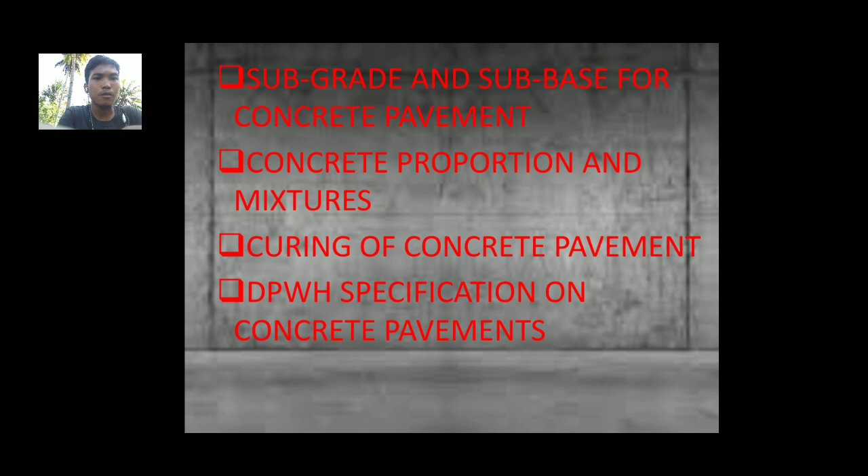So, good morning guys. I'm Jerin Cobol and I'm going to report subgrade and subbase for concrete pavement, concrete proportion and mixtures, curing of concrete pavement, and DPWH specification on concrete pavements. So, let's start with subgrade and subbase for concrete pavement.

Pavement is durable surface material laid down on an area intended to sustain vehicular or foot traffic. So, layers of pavement: concrete slab or surface course, sub-base course, then sa pinakababa, subgrade course. So, subgrade is the layer of natural soil prepared to receive the stresses from the layers above. So, itong pinakababa na katong ginatamper na yuta.

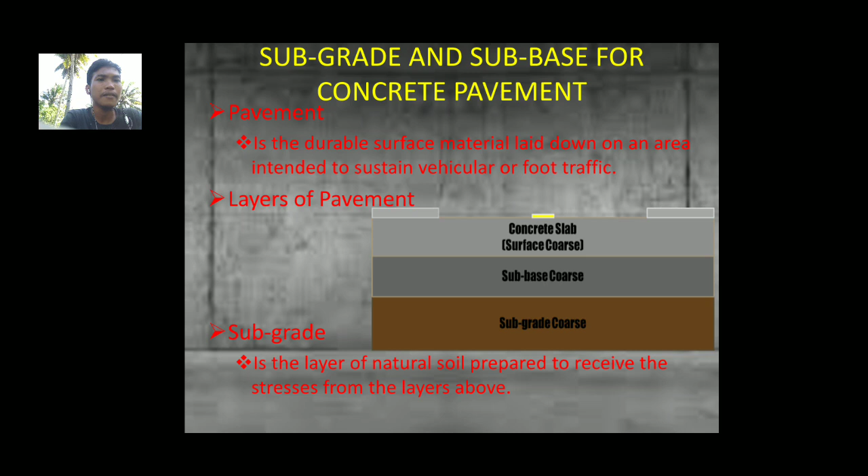Then, how thick should a subgrade be? It should be thick enough to withstand the loads acting upon it. Sa subbase, the subbase course is a layer of material beneath the concrete slab, and the primary functions are to provide structural support, improve drainage, and reduce the intrusion of fines from the subgrade in the pavement structure. How thick should a subbase be?

Thickness of subbase can range from 75 to 100 mm or 3 to 4 inches for garden paths, through 100 to 150 mm or 4 to 6 inches for driveways and public footpaths, and 150 to 225 mm or 6 to 9 inches for heavy use roads. Depende rin na siya sa imong buhatan kung unsang mga loads ang mga gidra.

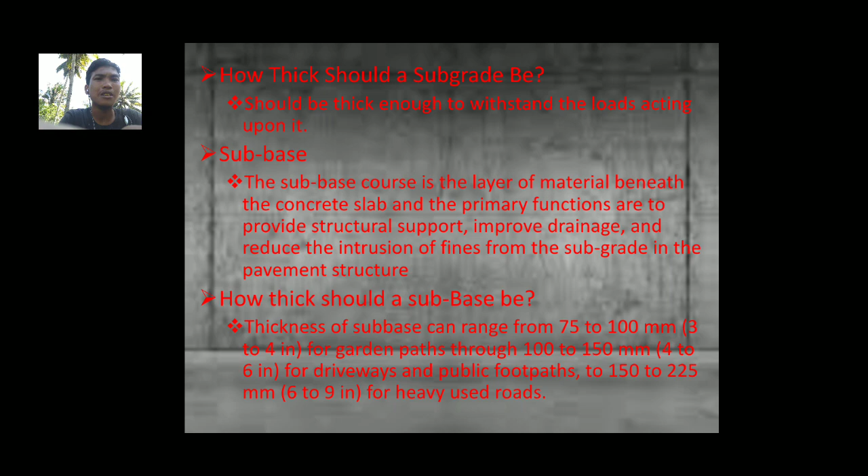So, dito to sa concrete proportion and mixtures. Concrete mix design is the process of finding the right proportion of cement, sand, and aggregates for concrete to achieve target strength in structures. The concrete mix involves various steps, calculation, and laboratory testing to find the right mix proportion. This process is usually adopted for structures which require higher grades of concrete such as M25 and above, and large construction projects where quantity of concrete consumption is huge.

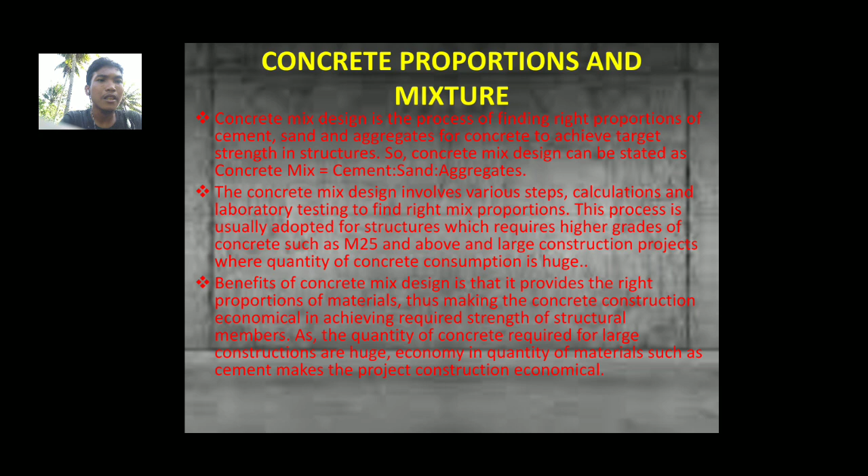Benefits of concrete mix design is that it provides the right proportion of material, thus making the concrete construction economical in achieving required strength of structural members. As the quantity of concrete required for large construction is huge, economy in quantity of materials such as cement makes the project construction economical. So, example ta og mix.

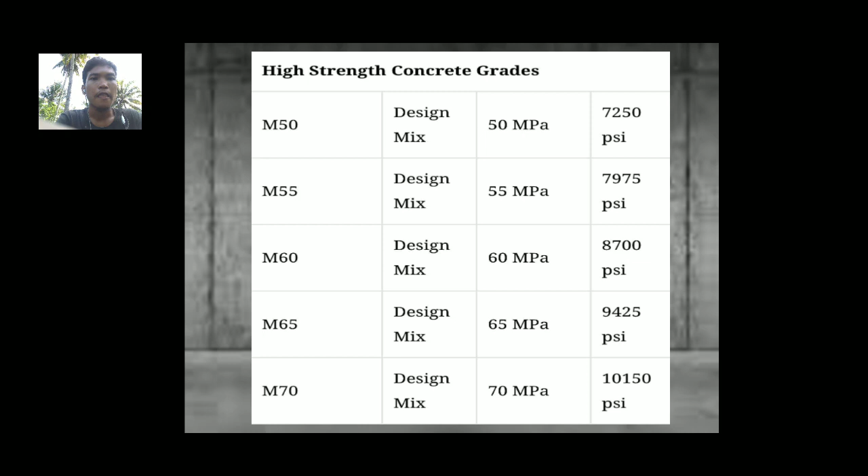Then curing of concrete pavement is maintenance of satisfactory moisture content and temperature in concrete for a period of time immediately following placing and finishing so that the desired properties may develop. So, methods and materials.

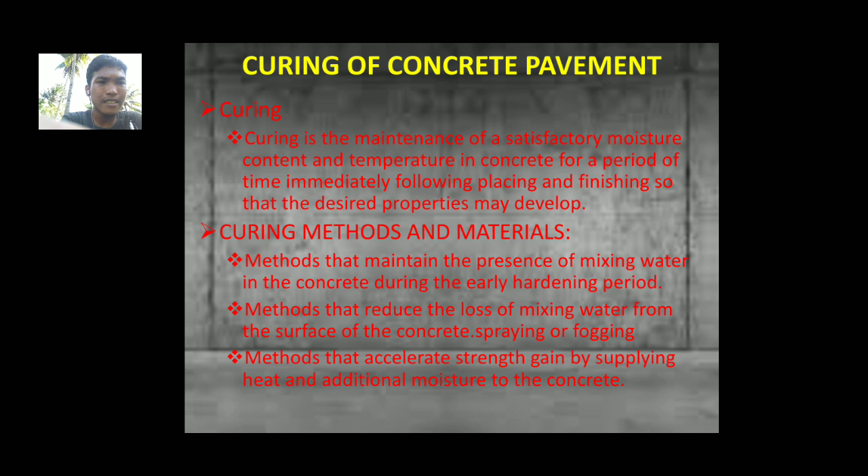Maintaining the presence of mixing water in concrete during the early hardening period. Methods that reduce the loss of mixing water from the surface of concrete: spraying or fogging. Methods that accelerate strength gain by supplying heat and additional moisture to concrete. So, ponding and immersion.

Ponding is typically used to cure flat surfaces on smaller jobs. Care should be taken to maintain curing water temperature at not more than 20 degrees Fahrenheit cooler than the concrete, to prevent cracking due to thermal stresses. Immersion is mainly used in the laboratory for curing concrete test specimens.

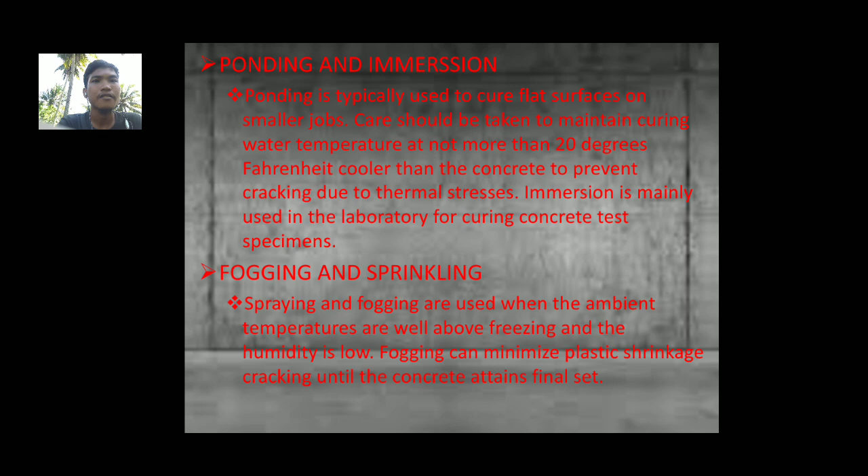And fogging and sprinkling are used when the ambient temperatures are well above freezing and humidity is low. Fogging can minimize plastic shrinkage cracking until the concrete attains final set. So wet coverings saturated with water should be used after concrete has hardened enough to prevent surface damage. They should be kept constantly wet.

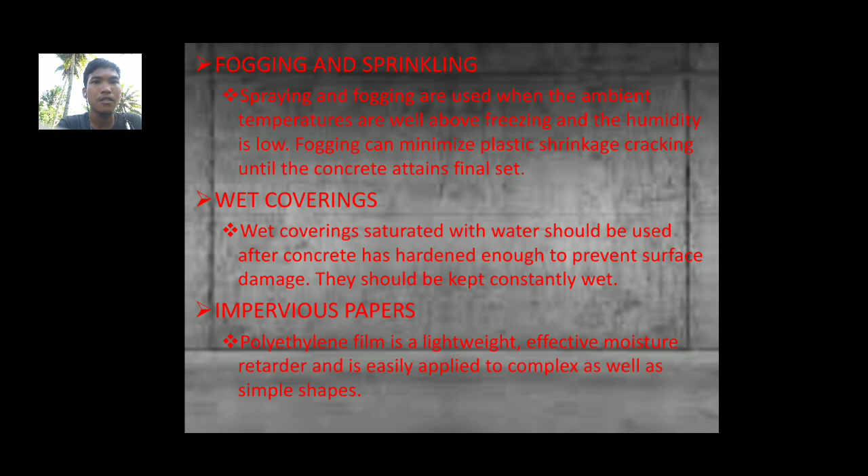Impervious paper. Polyethylene film is a lightweight, effective moisture retarder and is easily applied to complex as well as simple shapes. So membrane-forming curing compounds are used to retard or reduce evaporation of moisture from concrete. They can be clear or translucent and white pigmented. White pigmented compounds are recommended for hot and sunny weather conditions to reflect solar radiation.

Curing compound should be applied immediately after final finishing. So curing compound shall comply with ASTM C309 or ASTM C1315. Steam curing. Live steam at atmospheric pressure and high-pressure steam in autoclaves are the two methods of steam curing. Steam temperature for live steam at atmospheric pressure should be kept at about 140 Fahrenheit or less until the desired

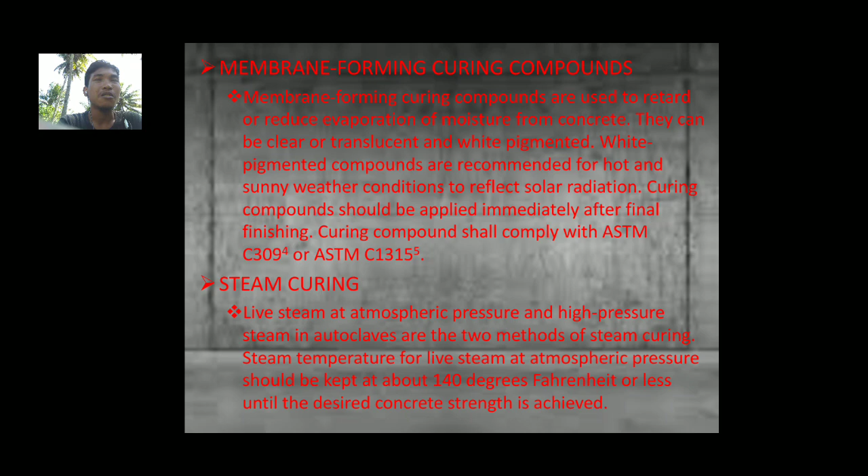concrete strength is achieved. So guys, medyo hangin kayo dere.

So, on the DPWH specification of concrete pavement, categorized under Item 311 of the DPWH Standard Specifications, which provides that this item shall consist of Portland cement concrete pavement, with or without reinforcement, constructed on the prepared base in accordance with the plans and specifications.

Material requirements. Portland cement shall conform to the applicable requirements of Item 700, Hydraulic Cement. Only Type 1, the normal or common Portland cement, should be used. Different brands, or the same brand from different mills, shall not be mixed, nor shall they be used alternately unless approved by the supervising engineer.

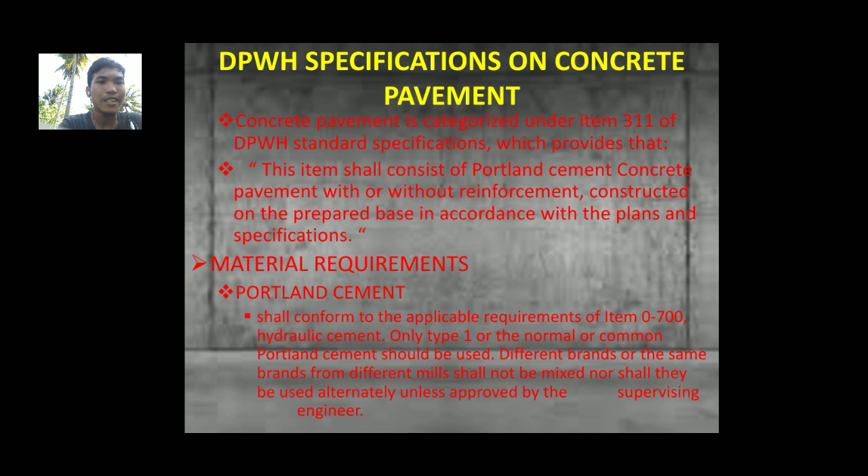So, fine aggregate shall consist of natural sand, stone screenings, or other inert materials with similar characteristics or combination thereof, having hard, strong, and durable particles. It shall be free from injurious amounts of organic impurities. Coarse aggregate shall consist of crushed stone, gravel, blast furnace slag, or other approved inert materials of similar character or combination thereof, having hard, strong, durable pieces, free from any adherent coatings.

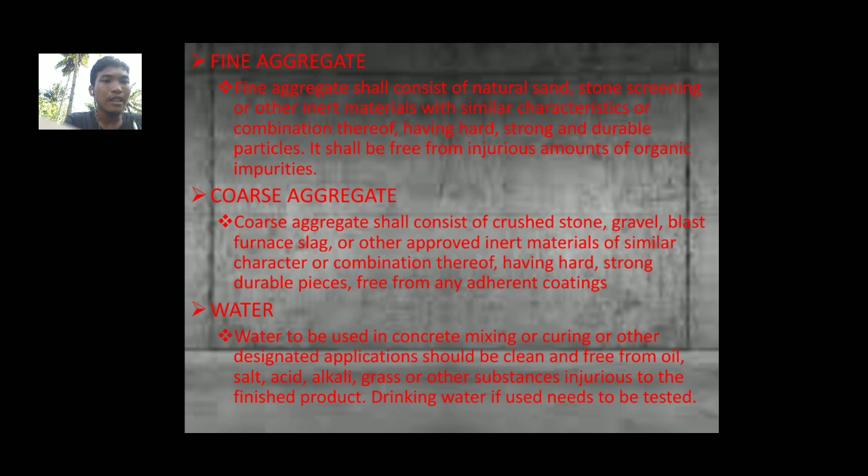Water used in concrete mixing, curing, or other designated applications should be clean and free from oil, salt, acid, alkali, grass, or other substances injurious to the finished product. Drinking water, if used, needs to be tested. Reinforcing steel, dowels and tie bars to be used in concrete pavement shall conform to the requirements of AASHTO M31 or M42, except that rail steel shall not be used for tie bars to be bent and restraightened during

construction. Joint fillers should be mixed asphalt and mineral or rubber filler. The preformed joint fillers are punched to admit the dowels. Filler for each joint should be furnished in a single piece for the full depth and width of the joint. Storage of cement and aggregate. The storage house for cement should be waterproof with a floor raised from the ground to protect the cement from rain or dampness.